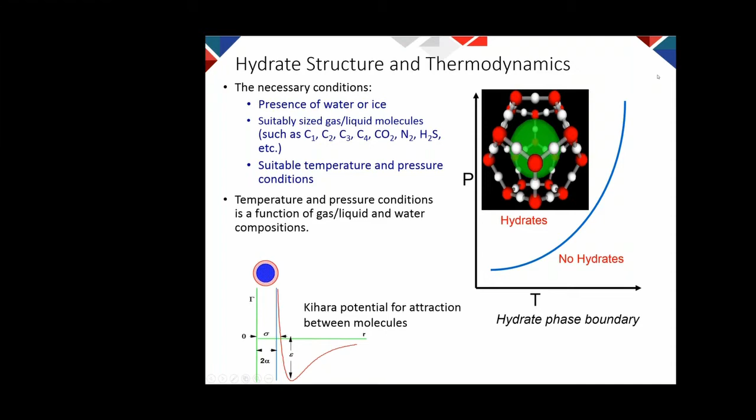I hope that you can see my cursor. This is the red one, the oxygen and hydrogen, so the hydrogen bonding is there. In addition to hydrogen bonding, you have a gas molecule in the structure, and that gas molecule, because of forces between water molecule and gas molecule, exerts extra stability to the structure. And that's why hydrate can form at temperature above 0.

And the interaction between two molecules is shown in this figure here. When the molecules are far away from each other, there is no interaction. When they get close to each other, they attract each other by van der Waals forces. When they get too close to each other, they repel each other.

Now that's the reason that in gas hydrate, some molecules can form hydrates easily, because here you cannot change the position of the molecule as much. What you are changing is the size of cavity, and that size will reduce the molecular distance between water molecule and gas molecule. So a small molecule like hydrogen or nitrogen doesn't like to form hydrates, it's difficult, and a large molecule like isobutane can form hydrate easily.

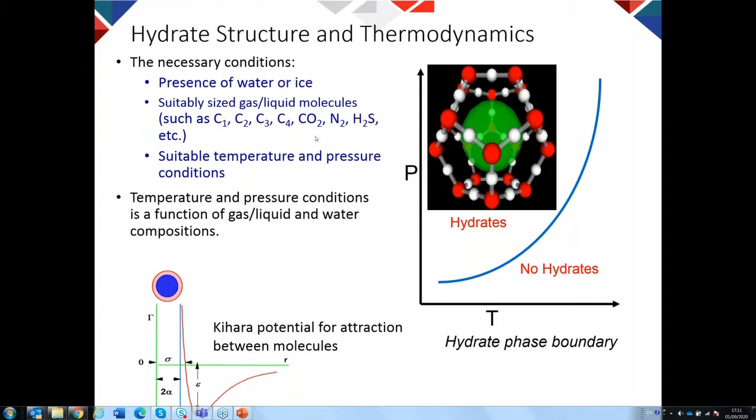So there are various structures that we discussed last time. Just a reminder, we have several different structures, and not all the cavities need to fill up to stabilize the structure, just enough molecules and cavities need to fill up.

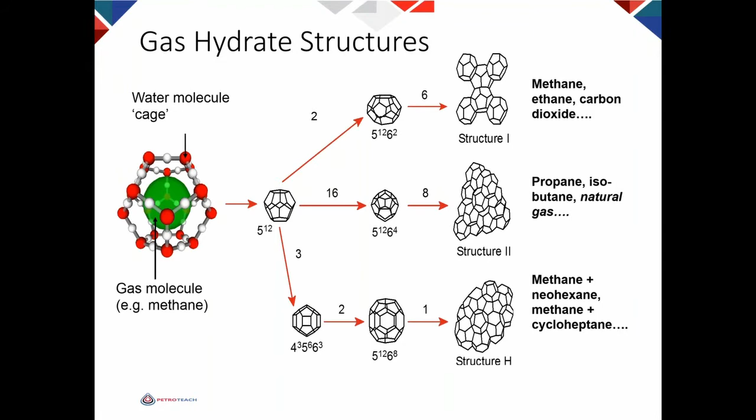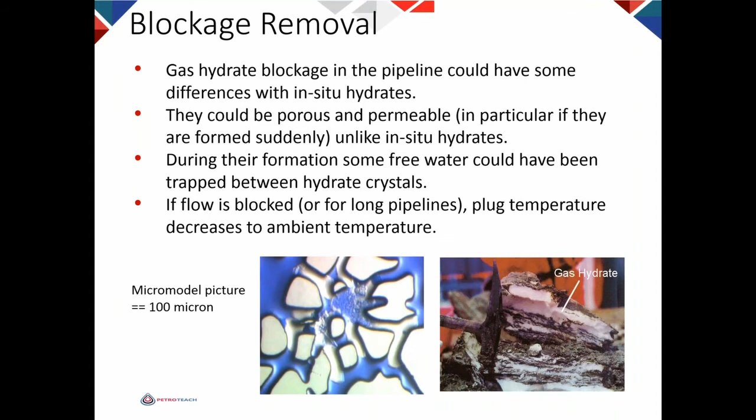But hydrate in nature has formed at low subcooling, and therefore has very little porosity. So they are most likely single crystal.

So one important point: if you get a blockage in a pipeline, initially it is not a difficult blockage. It has porosity, permeability. But with time, the amount of hydrate will increase - water that did not form hydrate becomes hydrate, and therefore the hydrate becomes more solid.

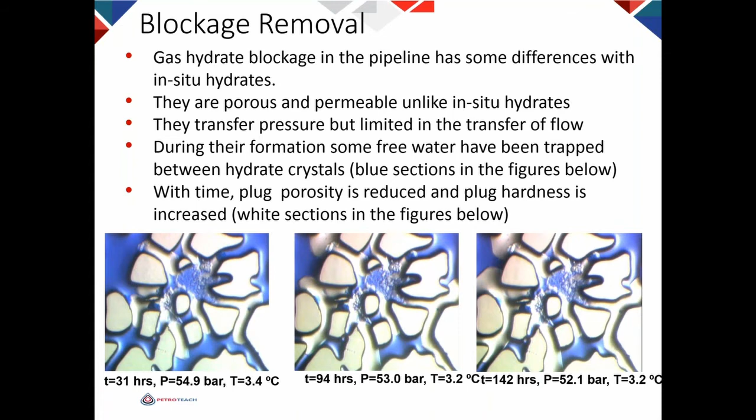In general, for hydrate blockage, there are various techniques for removing it. The most popular one is depressurization, either one-sided or two-sided. The other one is heating. Another one is injection of thermodynamic inhibitor. One thing you probably haven't heard of is changing the gas composition. And you can use a combination of them.

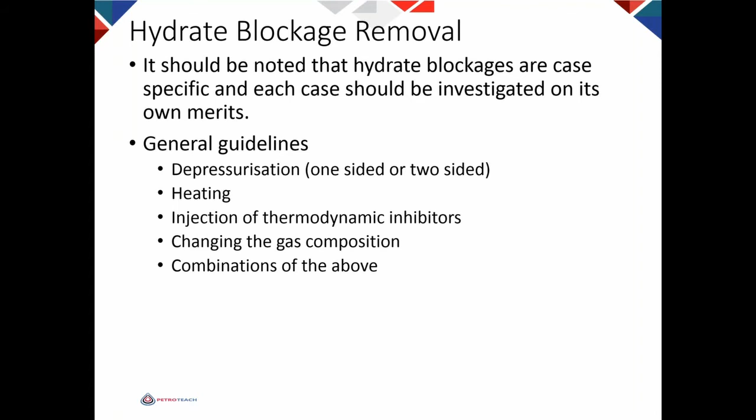So the idea for depressurization is that you reduce the pressure, you move outside the hydrate phase boundary and dissociate hydrate.

A misconception is that depressurization on its own can dissociate hydrate. But that's not correct, because when you depressurize, some hydrate will melt, but melting hydrate will need heat.

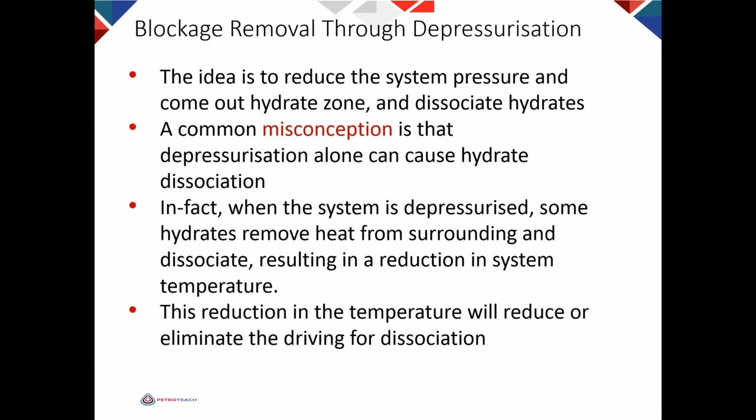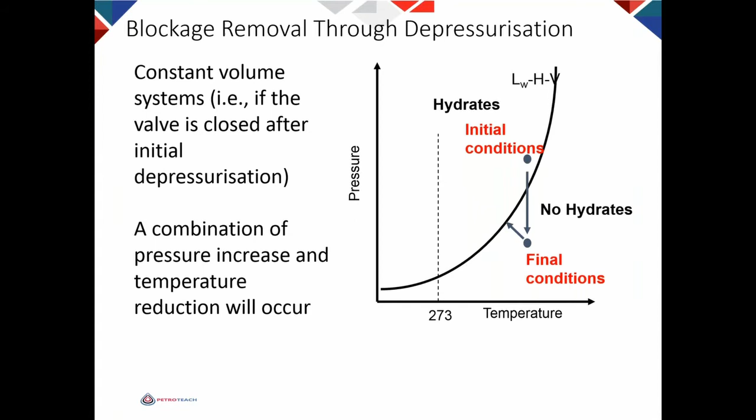One other option is to reduce the pressure further. If you reduce the pressure further, the driving force increases. You see that? The driving force for heat transfer increases.

But there are two risks here. You have to make sure you don't go below the water freezing point. The reason is that hydrate dissociation produces water, and that water can freeze if you are below water freezing point.

And that ice formed on top of the hydrate blockage can prevent heat transfer, it will work as insulation. And that will delay hydrate dissociation.

That is one risk. The other risk is the delta P between upstream and downstream increases, and that can result in plug movement.

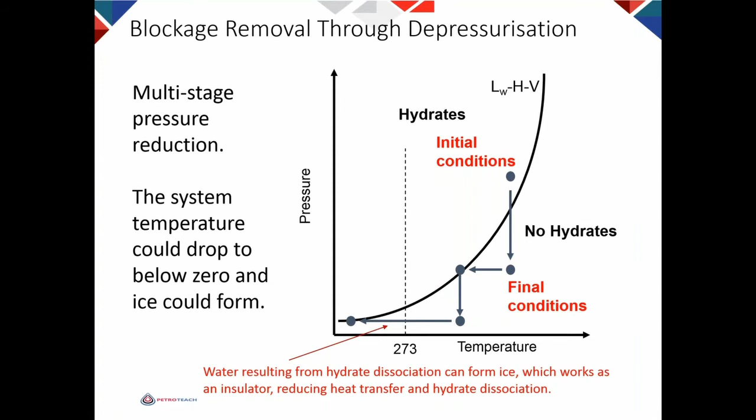The other misconception is that during depressurization, hydrate will melt at its end. That is wrong.

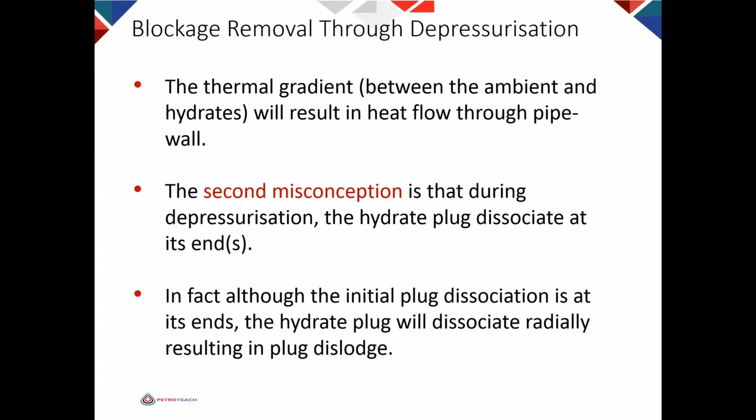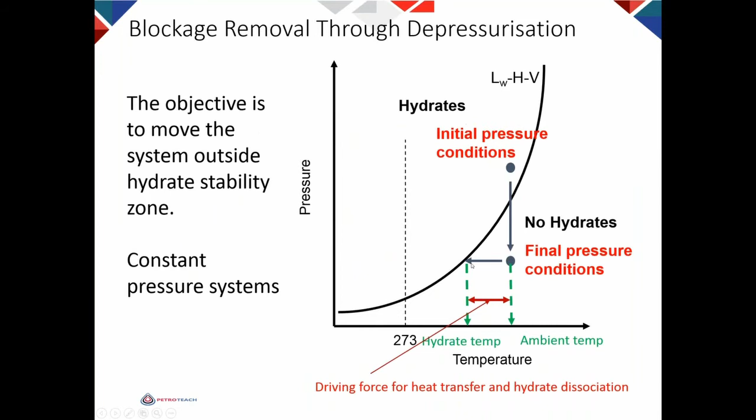that driving force will cause heat coming to the pipeline. This is the driving force. That driving force will cause heat transfer to the pipeline.

So where is the highest point? Highest temperature is at the wall, at the pipeline, internal wall of the pipeline, and the external of the plug.

For depressurization, you have reduced the pressure, so hydrate will melt radially. If hydrate melts radially, this pressure difference can make hydrate move, and that is very dangerous.

So you need to consider the type of fluid you have, or the location of blockage, to decide how much delta P you can accept.

If it is a straight line and there is oil in front of it, then you can have a higher pressure difference.

But if it is a gas line and you are close to a bend, you have to be careful how much you reduce pressure, because the plug can move and at the bend can destroy the pipeline.

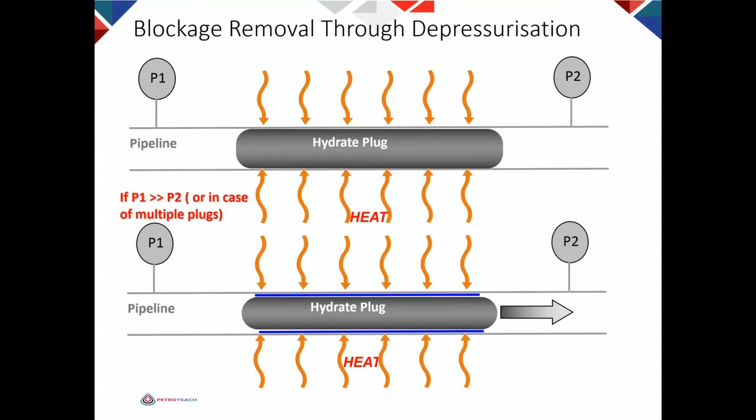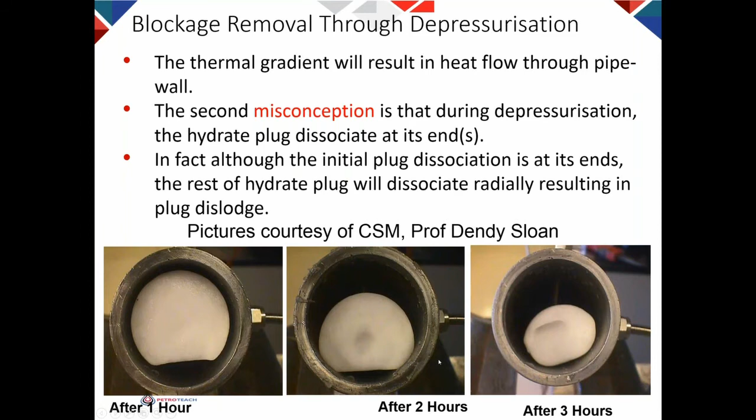So you need to be very careful that you don't form a projectile. And we need to decide what is the safe limit for delta P.

You need to be also careful about ice formation. If you form ice, ice does not respond to pressure change, and it is an insulator. So it protects the rest of the hydrate from dissociation.

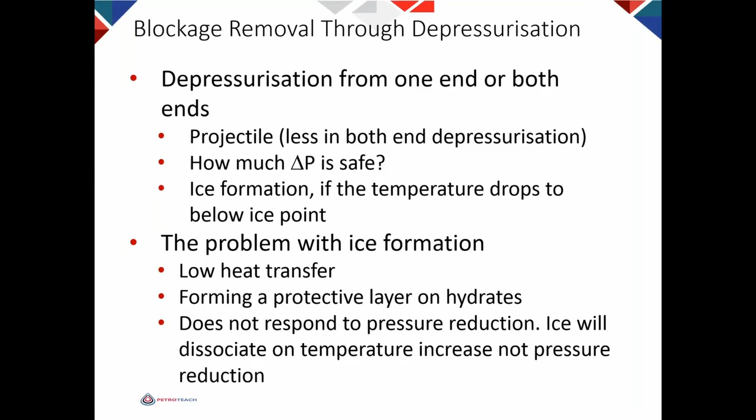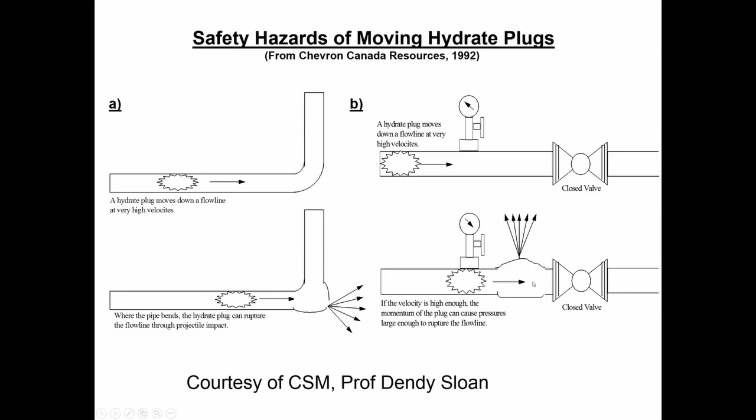This is a case study in the industry. You see that if you have a bend and you have a hydrate blockage, it can move and burst the line. Or if you have a valve, the same can happen. This is a real case. This is a pipeline schematic, and this is the real pipeline moving, destroying this van. And this is the remaining part of the pipeline.

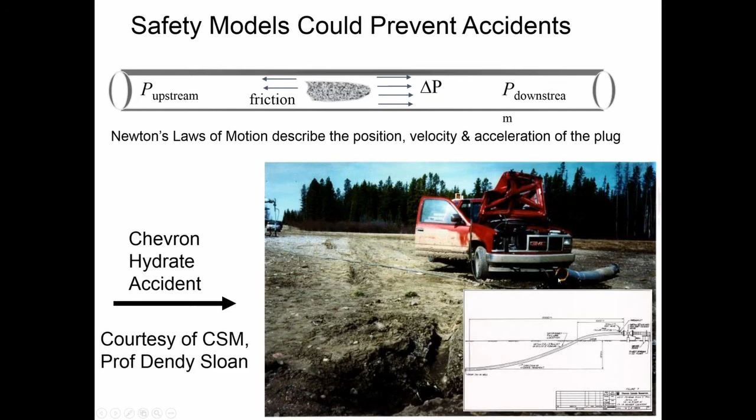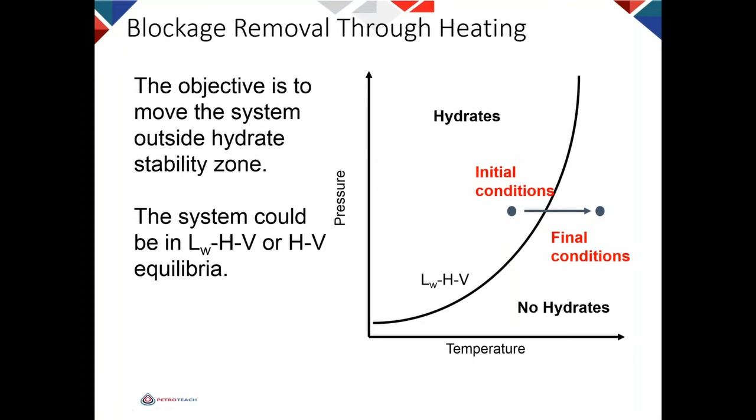So that was depressurization. The other option for removing hydrate blockage is to heat it. But where do you want to heat? You need to heat at the end of the block.

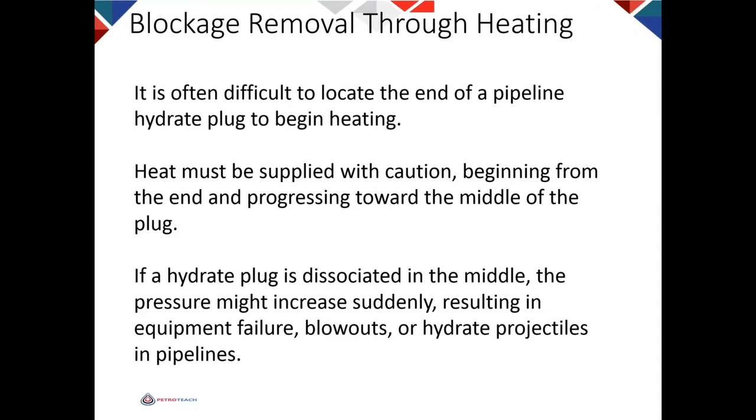Because if you heat in the middle of the block, then this can happen. Hydrate blockage, here you heat it. Hydrate melting produces water and gas. And if the gas cannot escape, the pressure goes high and it can burst the pipeline.

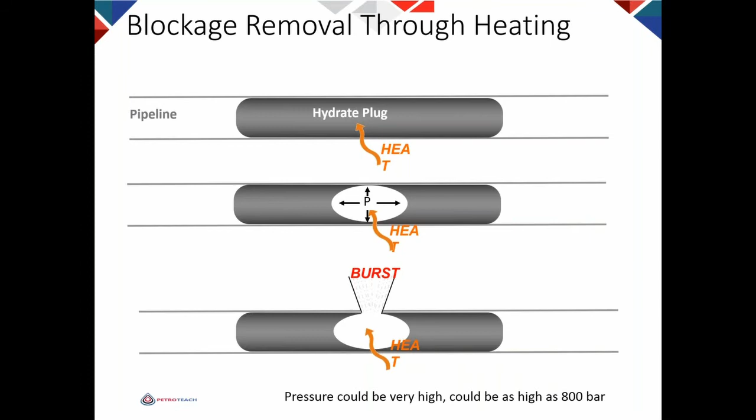My calculation shows that depending on the hydrate structure and filling, depending on how many cavities are filled, the pressure could be as high as 800 bar. So for heating, you need to find where the end of the hydrate is, to minimize the risk of damage to yourself or to the pipeline.

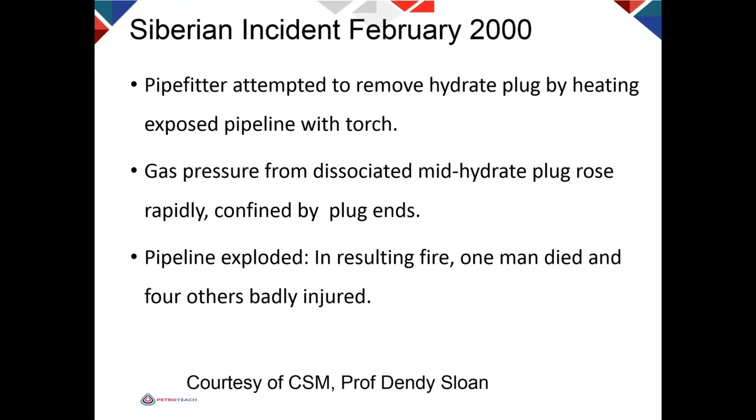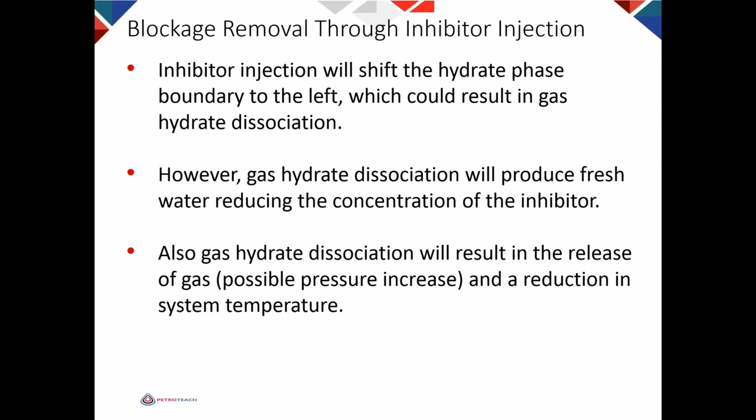The other option for dissociating a hydrate blockage is to inject inhibitor. Inhibitor will act on the water phase. This is a thermodynamic inhibitor, shifting the hydrate phase boundary to the left.

And the water produced from hydrate dissociation will dilute the inhibitor, and also the heat required for hydrate dissociation will reduce the temperature of the system. So you need to be aware of this.

The only thing we can control is keep the pressure, and we already know that we cannot reduce pressure too much because the plug can move.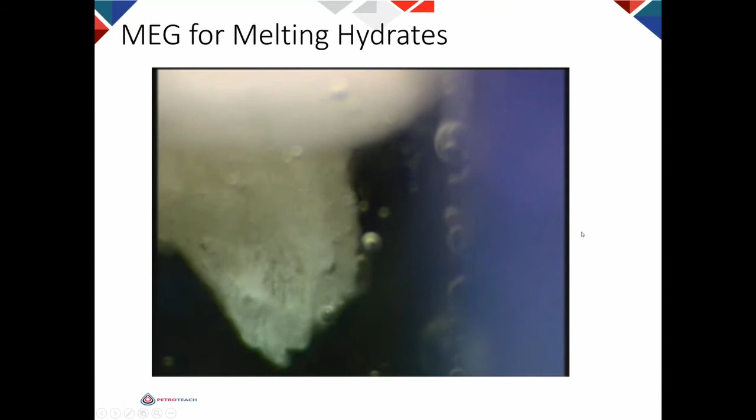Obviously, there are many factors affecting the choice of inhibitor: viscosity, density, vapor pressure. They all play a major role in the effectiveness of the inhibitor.

When you have inhibitor, the dissociation of hydrate makes the system cool. As the system becomes cold, then the viscosity will increase.

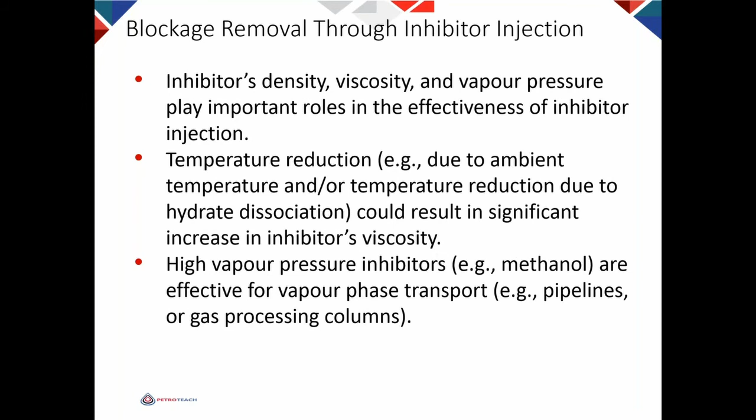Some inhibitors have high vapor pressure, like methanol. They are very effective for vapor phase transport. Therefore, for pipelines or gas processing columns, if you want to remove a blockage, they can perform better because the inhibitor can travel to the site of blockage in the vapor phase.

But if you have a blockage in a well bore, then MEG is better because MEG is heavier than water, will always be in contact with hydrate, and can melt them.

Our investigation shows, our experiments show, that you can use a mixture, and it would be more efficient if you use a mixture of methanol and MEG.

Inhibitor delivery by mechanical means, like coiled tubing, can be more effective, especially if you combine it with heating. Because even with inhibitor, you need to provide the heat, and that heat is either provided because of reducing temperature of the plug, or you provide active heat.

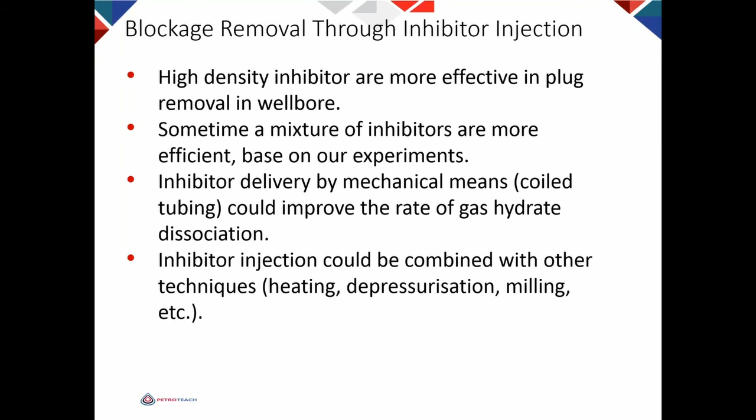So the other topic I want to discuss is the effect of gas composition on hydrate melting.

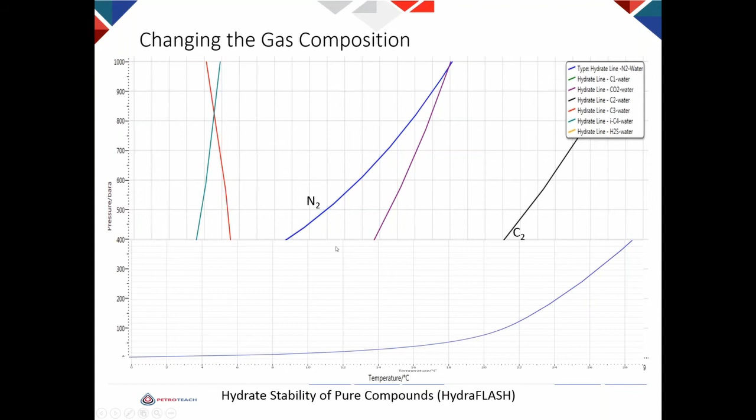This was in fact a real case. The pipeline was blocked, and there were two pigs, and they couldn't inject any inhibitor, but they could inject nitrogen. So injecting nitrogen, when it reaches the blockage, changes the composition of the gas there.

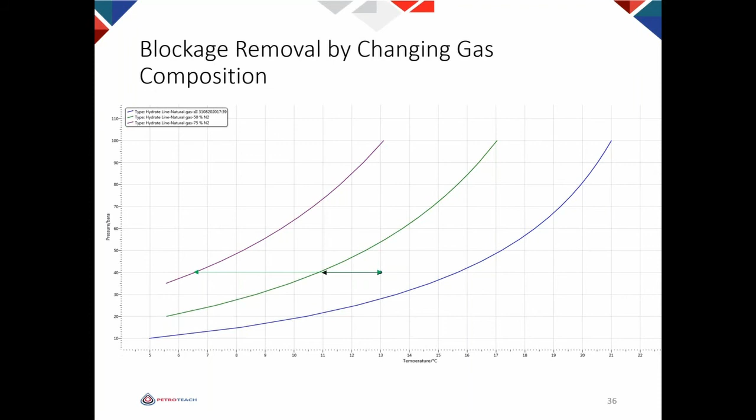Now a question about heating and insulation. As we discussed earlier, hydrate formation is exothermic, hydrate melting is endothermic, similar to ice. But the amount of heat required for melting hydrate is much higher. The question is, do we need to insulate or not? To be or not to be? You remember Shakespeare? So do you want to insulate or not?

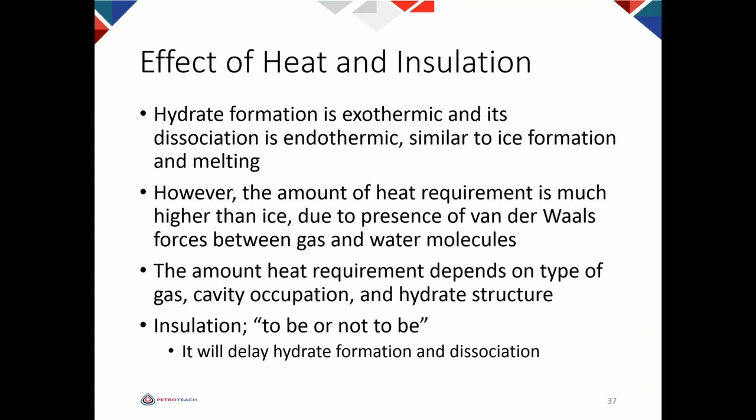You need to remember, if you do insulation, you delay hydrate formation, but also at the same time you delay hydrate dissociation. So you need to be aware of this. If you have insulation, it takes more time to block the pipeline, but it is more difficult to melt by depressurization. Obviously, for gas pipelines we don't use insulation, because the Joule-Thomson effect can reduce the pressure and temperature quite significantly.

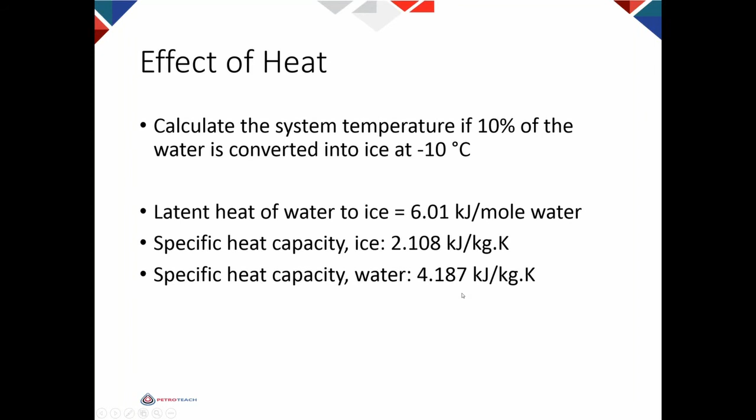There are some examples here. I assume water at -10 degrees, and assume that 10% of this water becomes ice. I want to calculate the final temperature. Latent heat of water-to-ice formation, the specific heat capacity of ice, and the specific heat capacity of water, I can calculate that if 10% of water becomes ice, the temperature from -10 increases to -1.61.

And that's the reason water doesn't freeze at 0. It melts at 0, because you need some subcooling to start ice formation.

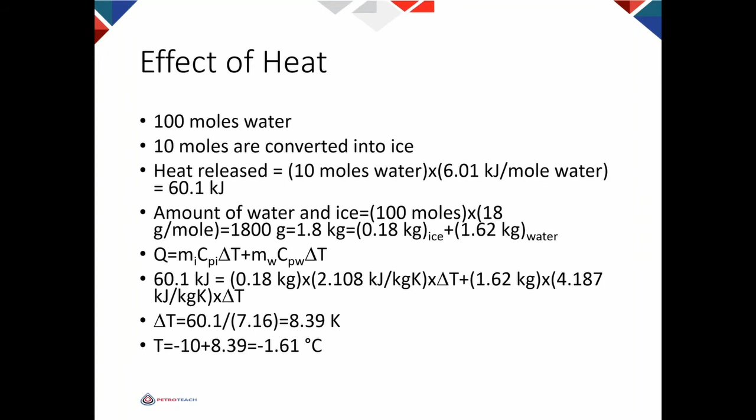This is the heat required for hydrate formation. Methane 9.03, ethane 9.36, propane similar, while ice is 6.01. So imagine you have methane hydrate.

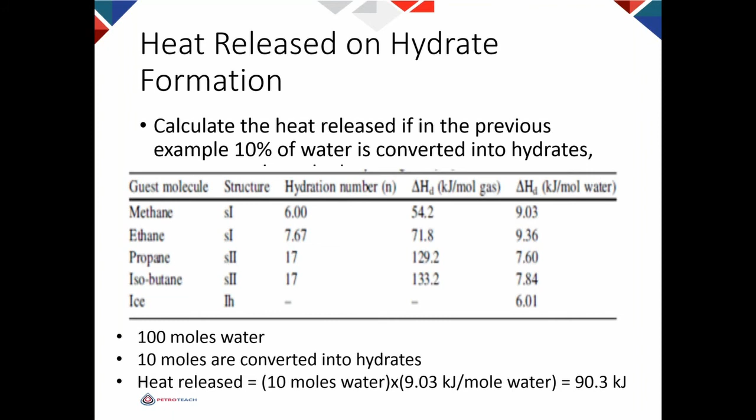In the previous example, assume 10% of the water becomes hydrate. What would be the final temperature? So that's the calculation. You see that the temperature would be 2.61. That shows the heat released during hydrate formation is much higher than the heat released during ice formation. You need to be aware of that.

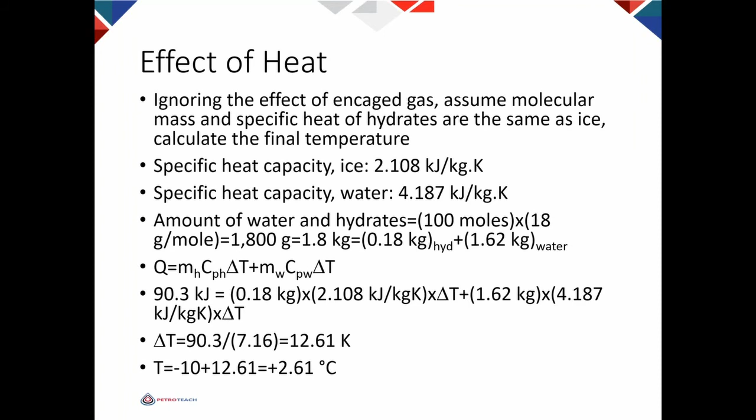Time required for removing a blockage. How much time do we need to remove a hydrate blockage?

So basically, imagine we have hydrate here, a unit length of the pipeline. You can calculate the amount of hydrate by knowing the internal diameter of the pipeline. Knowing the internal diameter, we can calculate the internal volume and the amount of hydrate.

If we know the type of gas or gas mixture, we can calculate the heat requirement for hydrate melting via dissociation. And then we can calculate the heat requirement for melting the hydrate. So we need to provide this heat to remove the hydrate blockage completely, or remove 20%, or 10%, or 50%.

People have different criteria. Some say if you remove 20%, for example, we can have inhibitor circulation, pressure maintenance, then we can have flow, things like that. But here I'm assuming we want to remove all of it.

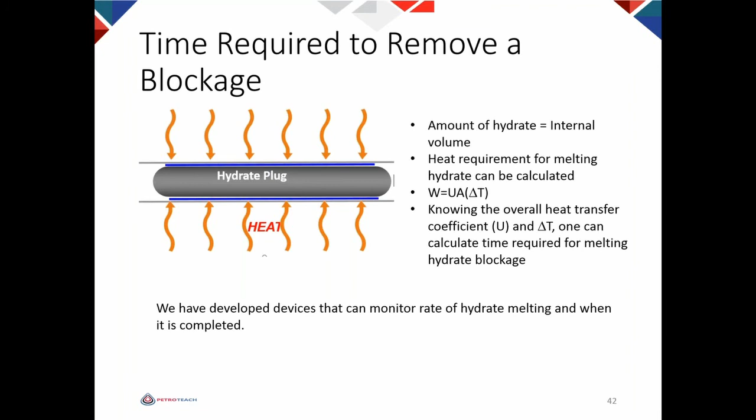This is some tests that people have done. Imagine you have a wellbore. The pressure at the bottom is 200 bar. You have a hydrate blockage. You have 100 meter of liquid water, and you have 100 meter of gas.

So you can see that if we reduce the pressure from 200 bar here, reduce the gas phase pressure to 10 bar, this plug will melt, as I mentioned, from the wall because heat transfer is radial, and that will release this plug, and this plug, because of the pressure here, will move upward, shift the liquid, compress the gas, and exert the pressure to the wellhead. That pressure could be 400 bar. 400 bar, a lot of wellheads can withstand 400 bar.

But if you reduce the pressure to 1 bar, the pressure before stopping the movement of the plug will be 4,800 bar, and no wellhead can stand that pressure. So you need to be very careful with plug movement.

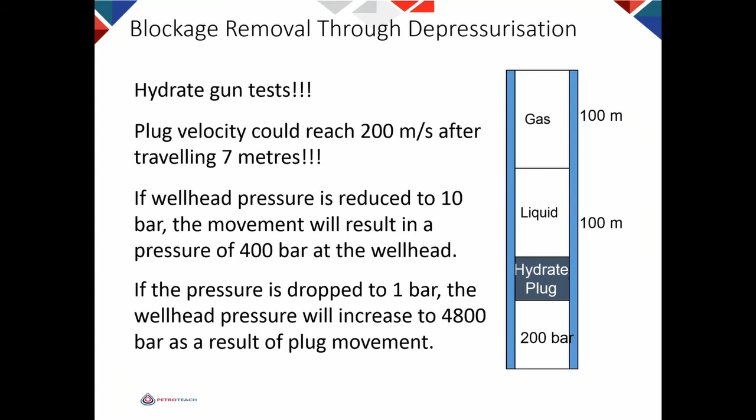There are other cases. We need to be aware that hydrate blockage changes with time. Normally, the initial plugs are soft and porous. You need to have a policy and a team of experts in your group to tackle hydrate blockage as soon as possible. Why? Because the more time you give to hydrate blockage, the harder it becomes. So you need to have the hydrate dissociation team in place or be in direct contact with a company or a group that has that expertise.

But you need to be patient. That's a key point. Once you understand that it is beyond your control, how long will it take for hydrate dissociation, because you can only exert certain delta P.

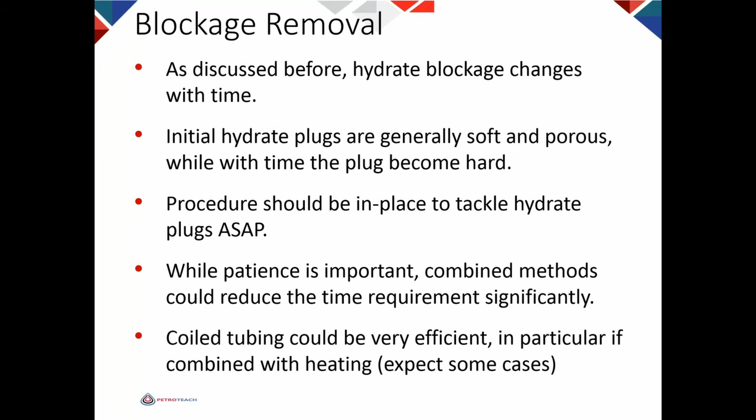There was one case, the pipeline had very good insulation. Seabed temperature was around 4 degrees, and the minimum we could go was 0. So the driving force was 4 degrees, and the time required for hydrate dissociation was almost 1 year. So you need to be aware of the limitation, especially when the ambient temperature is low and insulation is good.

So this is a case, offshore gas wells, hydrates formed due to leakage in subsurface safety valve. Initially, they used MEG, 1 meter per day, not very efficient. But if you use heating, you see 10 meter per day. That shows the importance of heating. If you use a combination of MEG and methanol, performance was improved. Blockage was removed after 5 months.

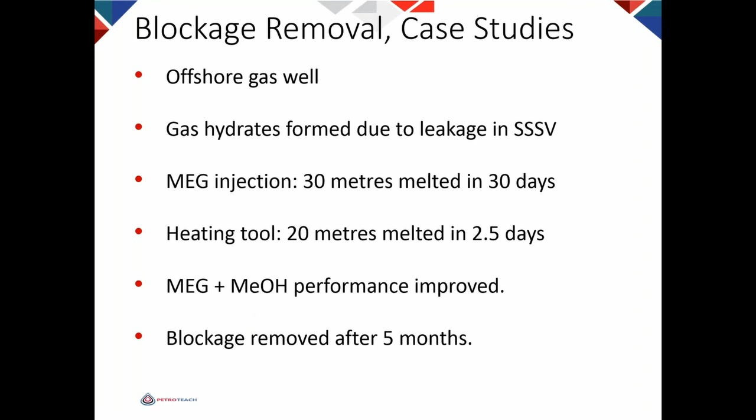Obviously, this experience I'm showing you belonged to more than 20 years ago. Now we understand better. We don't need five months, but it shows that it can take time. It takes time. Another one, offshore gas wells, 70 to 100 meter hydrate block, MEG and depressurization, 1 meter per day.

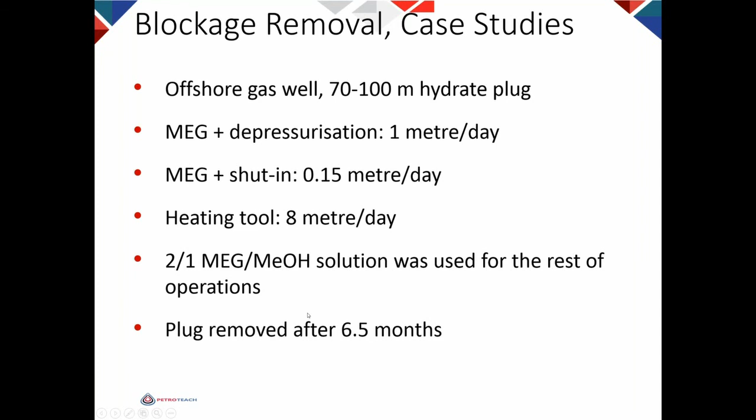MEG and shut-in, 15 centimeter per day. Heating tool, 8 meter per day. Combination of MEG and methanol for the rest of operation, and 6.5 months it took to remove the blockage.

Another one, hydrates formed due to the start of water injection in water alternating gas injection. MEG and depressurization used to remove hydrates from manifold. MEG and depressurization - sorry, that previous one was methanol - MEG and depressurization for 2 weeks.

Heated TEG and milling, 5 meters per hour. See that? Heated temperature - again, temperature is very important. Without milling, it's still good. And with milling, the problem is that you can go further down in the blockage, but you need to make sure that it doesn't block again.

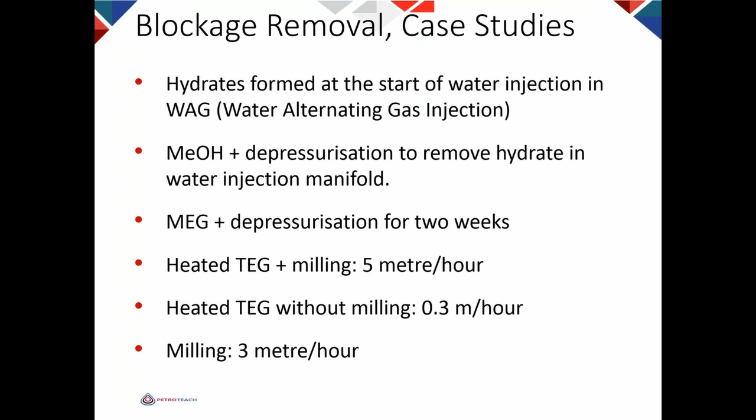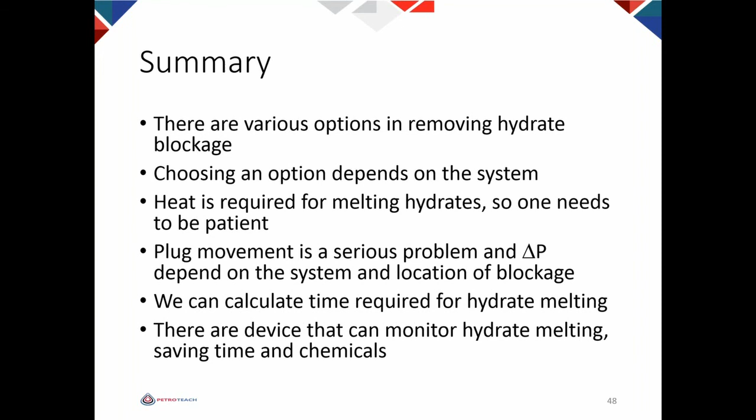So, summary: there are various options for removing hydrate blockage. Choosing an option depends on the system. We always remember that we need heat to melt hydrate, so we need to be patient. Plug movement is serious and can cause damage to health and safety and the asset. We can calculate the time required for hydrate melting and hydrate formation as well as blockage. There are devices that can monitor hydrate melting, saving time and chemical.